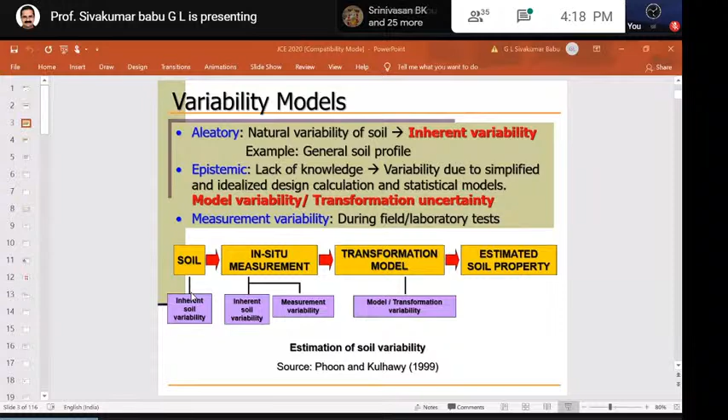Variability models. The heading is variability. Slide is visible, sir. Okay.

So the other important thing that we see in soils is what we call the scale of fluctuation. We know it's variable, and the moment you say it's variable, we call it a random variable. Random variables mean it has a mean value and a standard deviation. So if you know the mean value and standard deviation, then we have knowledge available from probability and statistics that we can use.

So for example, in an engineering sense, you have cohesion values and friction values, all of them variable. So for example, you have 10 cohesion values, 10 friction angle values, and you want to find out bearing capacity. Bearing capacity also will have 10 numbers, so it can be even 100 numbers - they're all variable, which is actually a fact.

But then the factor of safety itself is variable, and we want a factor of safety such that it is always more than 1. What is the probability that the factor of safety is more than 1? If it is 95% of the times - say for example, if you have 100 calculations and 95% of the time you get factor of safety more than 1, it only shows that the reliability is 90 or 95%. So that is one thing.

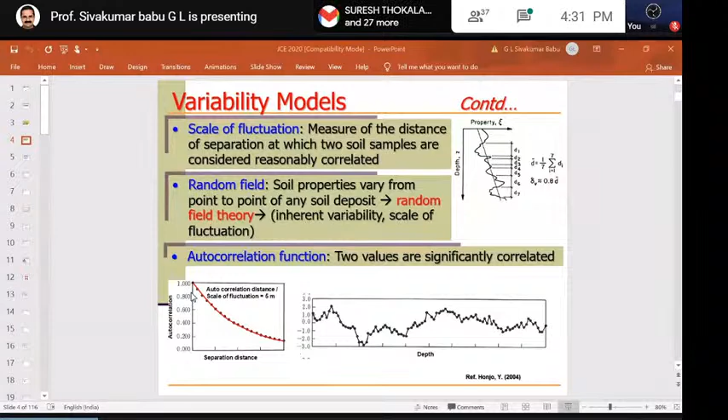Sorry for the interruption, sir—slides are not moving again. Which slide didn't move? Actually the slide is stuck at the 4th one. Only the 4th slide is visible, sir. Okay, are you able to listen? These are okay. Now you're able to see this number, this one you are able to see.

Thank you. These 3 slides are more about general things you must have heard already, so I can just quickly go through the third.

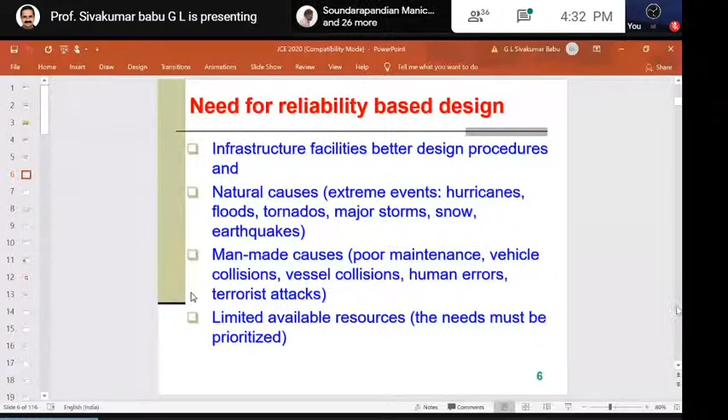The need for reliability-based design is very important because most loads and resistances are variable, so reliability analysis is important. The motivation is that variability exists in soils and concrete everywhere, so you can't just use an arbitrary factor of one or whatever you want. It is not correct—you have to arrive at it based on reliability analysis, particularly since the loads are highly variable.

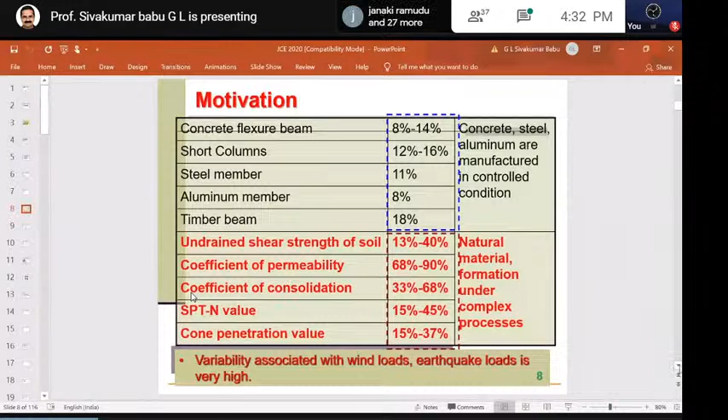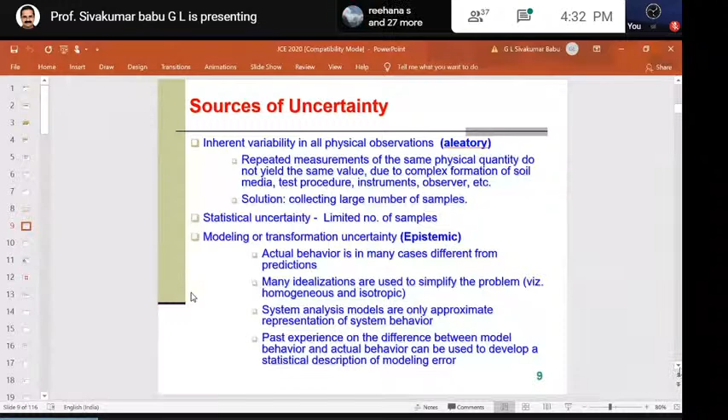Hello? Yes, sir. It is okay.

Visible, sir. So the thing is we want the capacity to be more than the demand, but how much more should it be, theoretically? We normally provide more than 1.5 to 2. The factor of safety is as high as 5 or 10 because we don't know about the design methods properly.

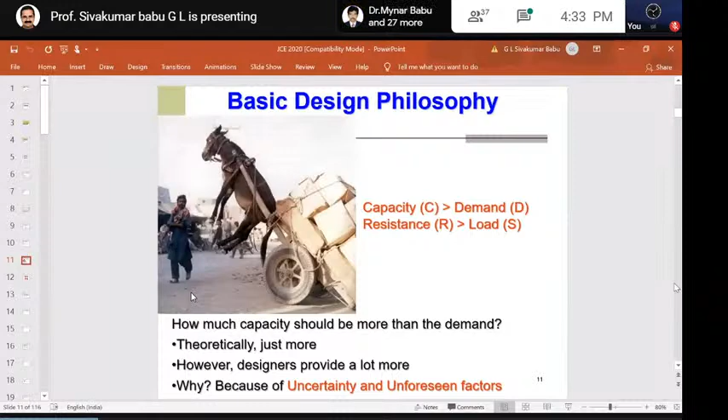I will show you that, and the other thing is, most of the time when you are trying to predict something, you should have a theoretical model and prediction, and it should be reasonably correct. So you use an equation for pile load capacity, or an equation for bearing capacity, and then you do a test, so it should be reasonably correct. There are some different conditions.

We call it unreliable and invalid, which we don't want. Unreliable but valid means there is a lot of error associated with that, like an SPT test. This is an example of an SPT test.

Reliable but not valid means there is always a bias. Say, for example, we know there is always a 20% extra - you use the equation, but it's always 20% extra. So we call it bias. It's reliable only, but you know what the bias is, so you correct for it. How do you correct for bias? We know it predicts at least 20% more all the time. So now you know that 20%, and you calculate the mean value and standard deviation of the bias. Once you know the standard deviation and mean value of bias, you can bring it down to the proper number. So both reliable and valid is something hitting the target.

Again, it should be reasonable, not too many errors - like more than 10% or 5% in other engineering fields, like mechanical and other things, would not be accepted. But unfortunately in soils, everything is naturally variable. In civil engineering, we accept this because the variability is high.

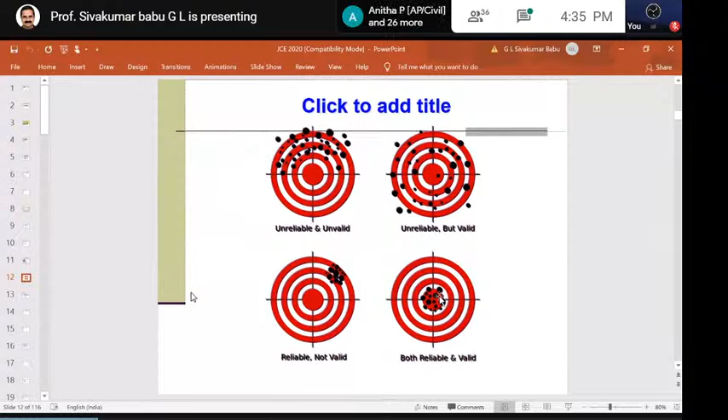Because one important thing is there is always a probability of failure, and probability of failure can never be zero. But in manufacturing, like mechanical and electronics, they try to reduce the probability to very low levels - they use what's called 6 sigma and so on.

So the 3 sigma rule we know, based on normal distribution. And the rule is that design codes must always have a rational factor of safety - it should not be too expensive, and it should not result in too many failures. So we need to do a reliability analysis.

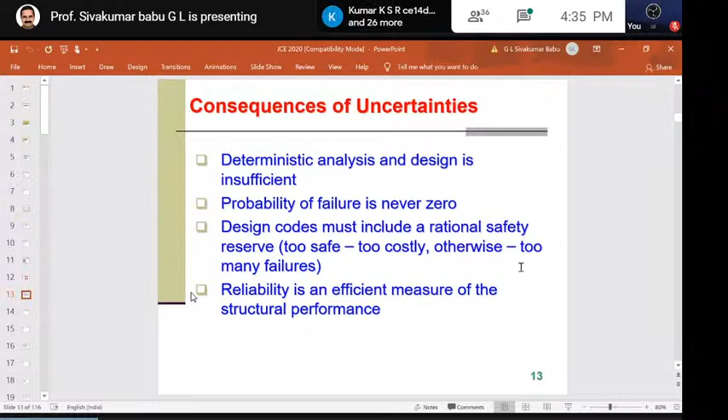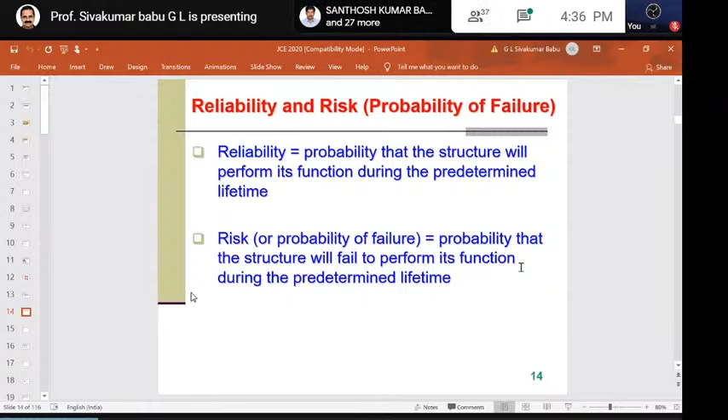That's what we'll do. Reliability analysis is the probability that the structure will perform its function during the predetermined lifetime, whereas risk is opposite - risk is also in terms of failure consequences. Like, for example, sea erosion, and what the impacts are. You need to look at how many people are affected, particularly in environmental engineering and other fields.

Another problem is that the risk approach is not rational - what is risk to you is not risk to somebody else. Because of that, risk perception is different. Like earthquakes - you give a lot of weightage to earthquake failures and flood failures, but poor maintenance, we don't care, at least in the Indian context. So risk perception needs to be rational and uniform.

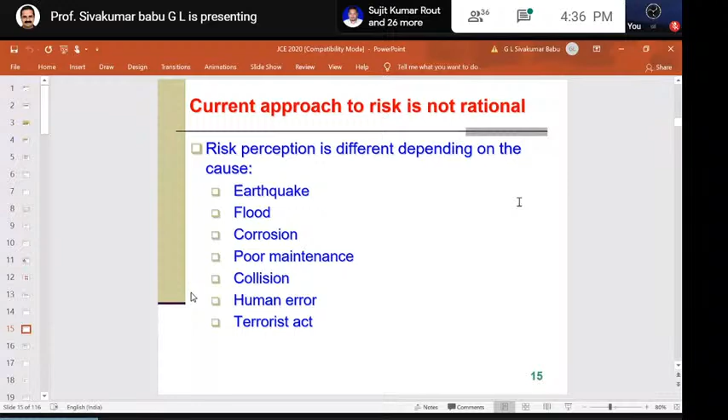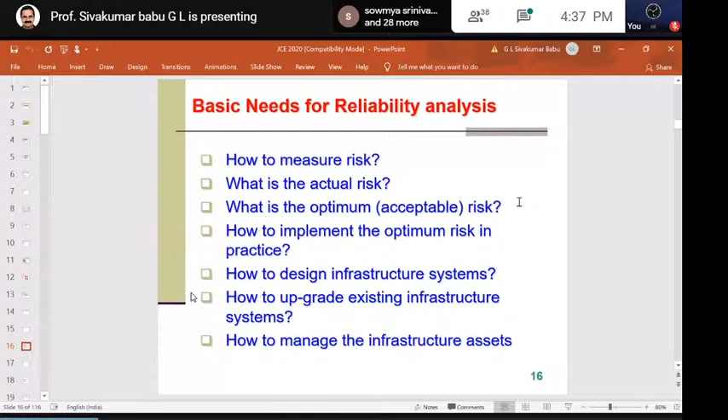So we'll discuss how to measure risk or reliability, how to incorporate risk or reliability in practice, and how to design infrastructure systems for risk, whether it's a road or a pile foundation - the philosophy is the same. And how to upgrade existing infrastructure to have a certain reliability, because if you go to the World Bank or ADB, Asian Development Bank rules, they say you have to meet certain standards, otherwise your project won't be approved. So that's what we'll see.

As I said, in loads and resistances - load has certain parameters. For example, wind load or wave loads - what is the speed, what is the load, it has some equation, right? And earthquake also has earthquake loads - it has a maximum credible level, all the parameters of the earthquake that we should have.

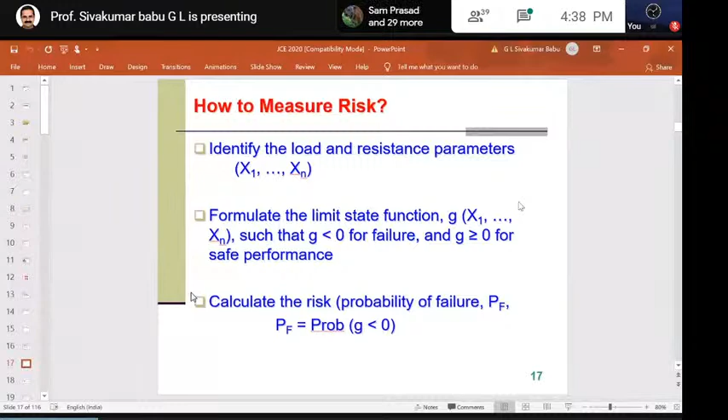Resistance parameters - what resistance parameters do you need to have? C, phi, gamma, modulus - all of that are resistance parameters, right? So we try to formulate a limit state function. Actually, factor of safety is a limit state function, because factor of safety equal to 1 is called limit state - that is called the state of failure. We don't want factor of safety less than 1, that is for failure, and more than 1 is reliable. So you can say R minus S, resistance minus load. Resistance should be more than the load S, or capacity should be C minus D, like that. So we can always say that. So this is what I would like to illustrate, that the resistances...

Are you able to see this diagram? Figure slide 18. Hello. Yes, sir. Hello. Yeah.

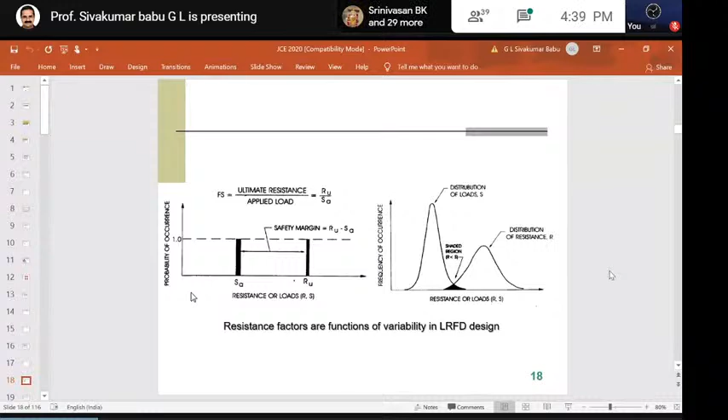So the resistances should always be more than the loads, and they're all distributions. So as I just mentioned, the factor of safety approach is always tricky, but our interest is to say to what extent is the factor of safety value evaluation is correct - you can say, because it can have a bias. And what's the probability that the factor of safety is more than 1? If I say that it is 95%, then it's good. That's what it is. And the advantage is that it can take care of the construction costs - there are some methods how it can be done.

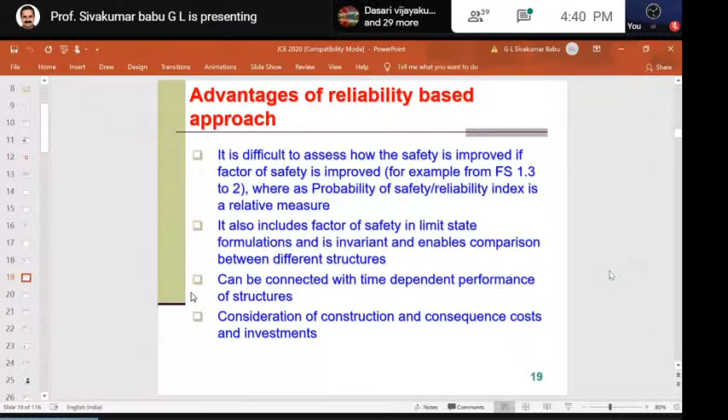Say, for example, the probability of failure or safety in a mine - nobody is there, so the consequences are minimum. But in a centrally located place in Vizag, the consequences could be very high. So you may intuitively go for higher factors of safety, but it may not be necessary. You can exactly calculate if you know the consequences. Say, for example, there will be blocks, there will be project delays - there are so many consequence costs. If you're able to have an idea of the consequence costs, you can come out with a proper safety factor. What is the required safety required?

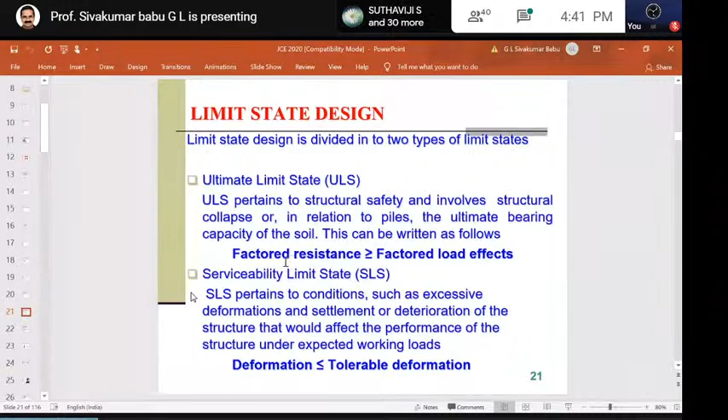So we do working stress method of design, which we don't want. This is what I was telling, that we'll have factored resistance - the resistance should be always more than the loads. So we use some factors, we always reduce the resistance, because how do you calculate that resistance? It's based on the statistics. It could be 0.5, 0.8, depends on the probability distribution, and even factored loads depend on the loads. So for example, you're designing it for 10-year loads, or you're designing for 50-year loads, so the factored loads will be different, like 1.2, or it could be 1.8. Even creep factors, anything - if you have data, you can always do that. These factored values are important.

And so the advantage of this is that it will lead to efficient design - that's what people have seen, because I will show one or two examples on cost savings as well. And it gives more perception of the uncertain factors, rigorous treatment, whether it is for superstructures and substructures, and the codes can be relooked at properly. If our quality of control is not good in India, your factors can be put in there. You measure what is the quality - you may have poor equipment in India, whereas they have automatic equipment in some other project. So they can really show that by taking some samples, or they need to have experience to say no, I don't go for the same factor of safety because I have better equipment, my uncertainty is quite less compared to the SPT test that some other company is doing. So you can come out with this sort of numbers, and that is there in certain projects also abroad.

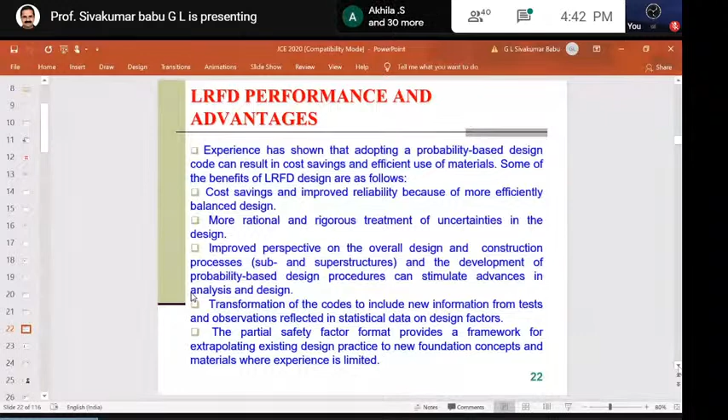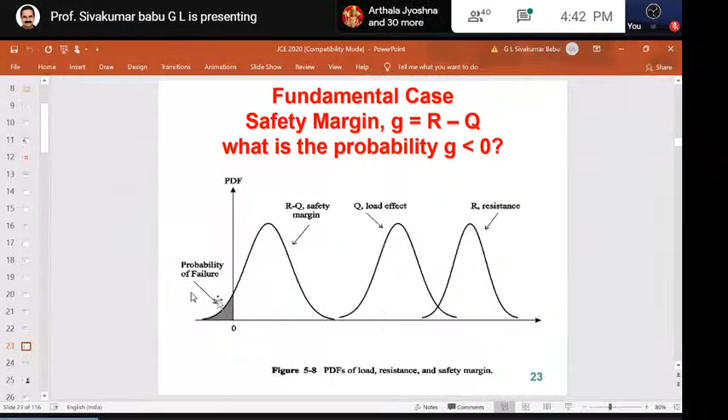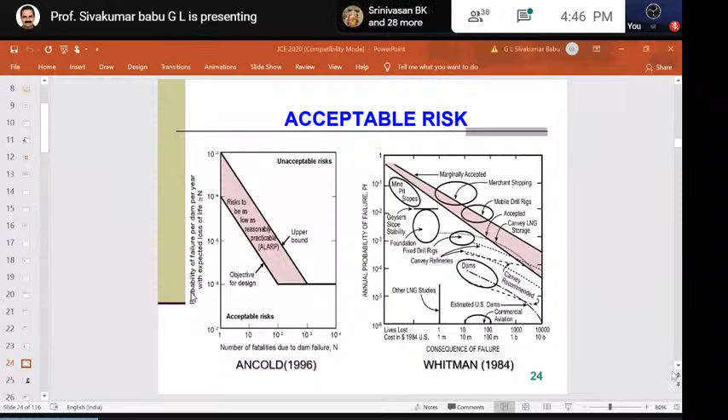So how do you calculate this probability of failure? I told you about the mean value of loads - they'll have a normal distribution, a bell-shaped curve. If you know the mean value of resistance and the mean value of loads, you find out the mean values and standard deviations, and you'll get beta. It should always be 2 or 3 or something, or the probability of failure has to be quite low.

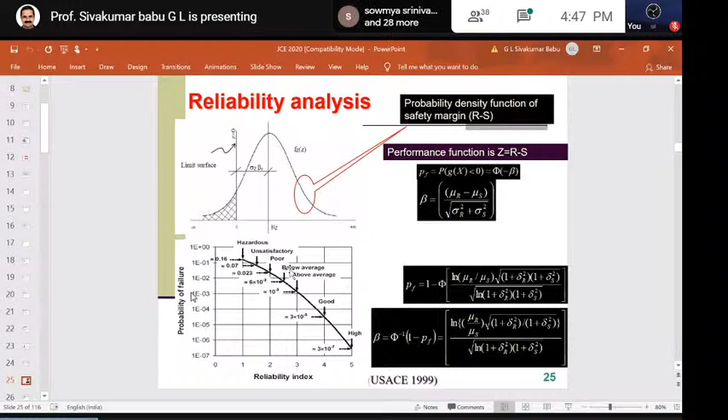This is actually given by the US Corps of Engineers - people working on dams follow it, or even in regular codes they follow it. So beta is in terms of 2 or 3, as I gave in a table here. If the probability of failure is 0.1, beta is 1.28, but if it's 1 in 100, it's 2.33, and 1 in 1000, it's 3.09. So for shallow foundations and deep foundations, you try to use this.

The important thing to realize is that this is a notional probability - it's just to improve our understanding of the behavior of structures and safety. It's not that if we have 10 structures, exactly one should fail. It is a relative measure of safety. I cannot say if one factor of safety is 2 and another is 1.6, which one is safe - somebody may say 2 is more, but I'll give an example in a few minutes showing that idea is totally wrong.

So we'll discuss how to measure risk, and there are calculation methods - first order reliability methods, Monte Carlo simulations, and many other things. And what is acceptable risk or reliability? Codes are available, like US Corps of Engineers, Joint Committee on Structural Safety - they're all there.

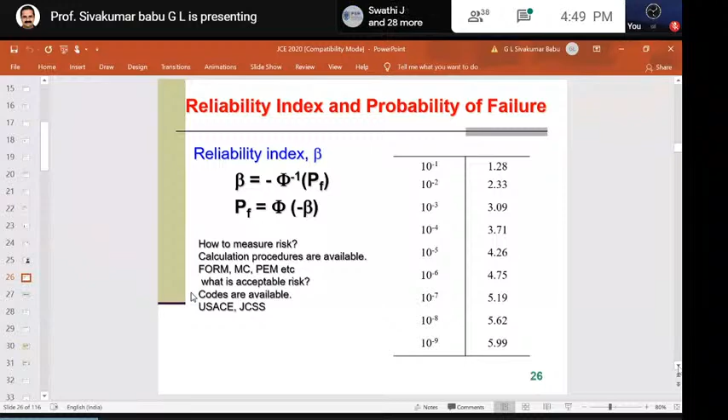Whatever people do in designs, it's already inherently built in. Sometimes in some countries, if you directly tell them about reliability, they may run away - there's a possibility, they say 'I don't want to understand this probability distribution and calculation, tell me in a simple way.' So people have already built these in; they may not know the details, but the people who make the codes know what numbers people should use in these conditions.

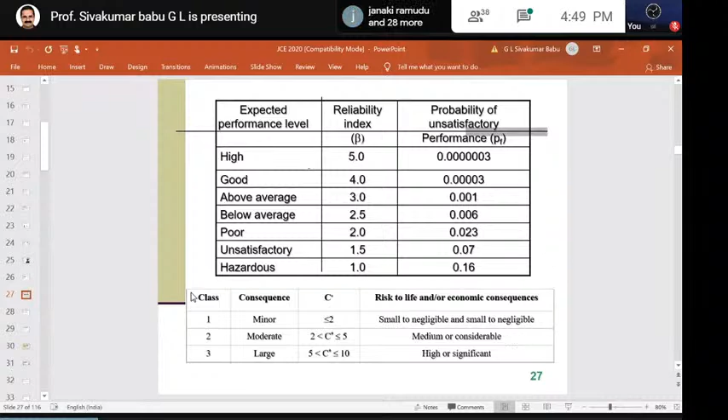So this is given by the US Army Corps of Engineers, and this is given by the Joint Committee on Structural Safety. I wanted to give an example of a foundation design in a marine environment.

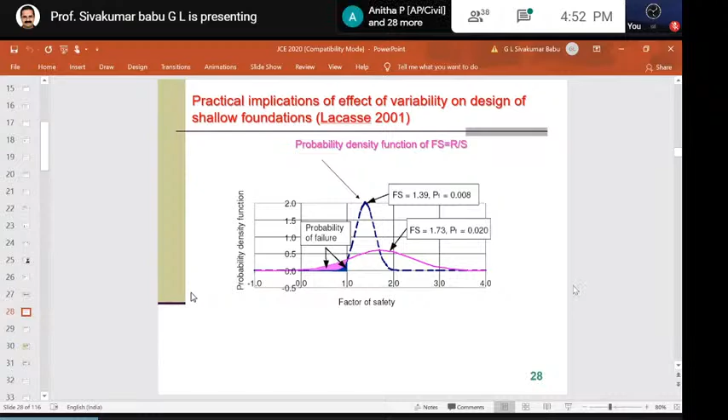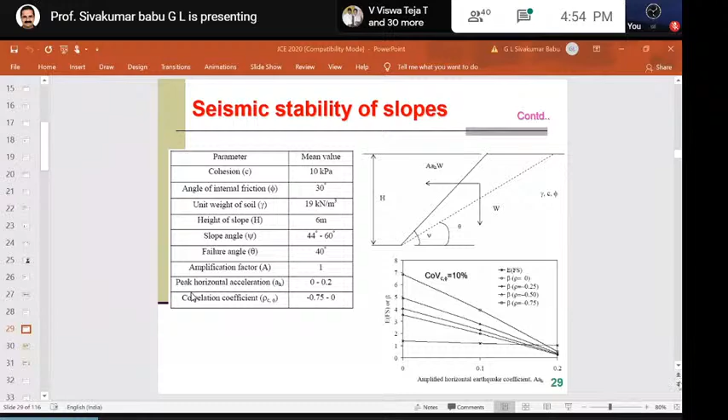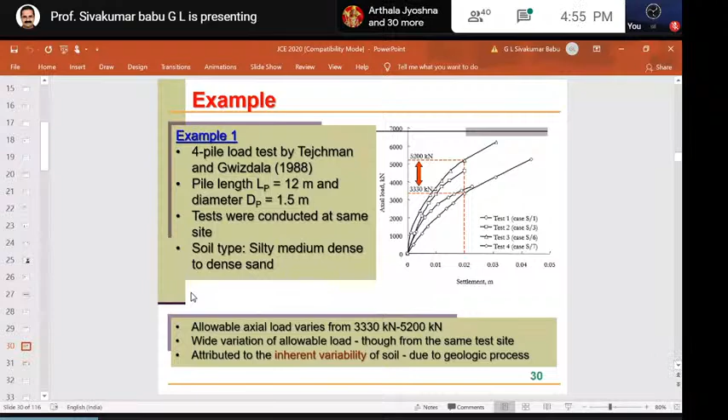This is about pile load tests. In literature, you have many examples that say, for example, if you're looking at an allowable settlement of 0.02, you will get varieties of loads. Like, on the same type of soil, you have 4 tests done, and the load varies from 3330 to 5200 kilonewtons. So which one should I take? This is actually available in literature, in denser sand. Why is that? There's nothing wrong in the testing, but it's inherently variable due to geological processes. You have to consider this. How do you do this is a question we'll see.

This reliability analysis we already discussed. We have a lot of methods to do that. One simple way is that you know the capacity, how to calculate factor of safety. So if you have say 100 C values and 100 friction angle values, you can calculate 100 factors of safety. Then you tabulate them and find out what is the probability of safety being more than 95%. You take it, and corresponding to that you calculate the factor of safety, because all the factors of safety will have a distribution, like I showed you in the previous example. So corresponding to 95% you get, whether it is 1.2, 1.5, 2, or 3, don't bother, because that gives you the probability that it's 95% satisfactory. So that's the way. That is called Monte Carlo simulation.

Actually, now you can do it in 5 minutes. You don't need to work too much. You have Excel or MATLAB or something, you can even generate it. I will show you it can be done in a simple way. There are so many ways of doing it.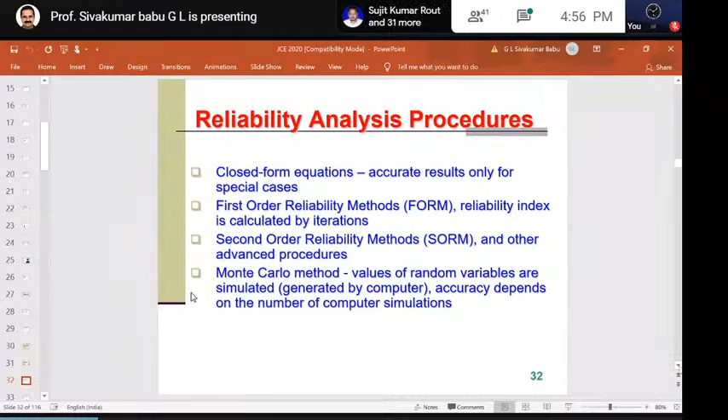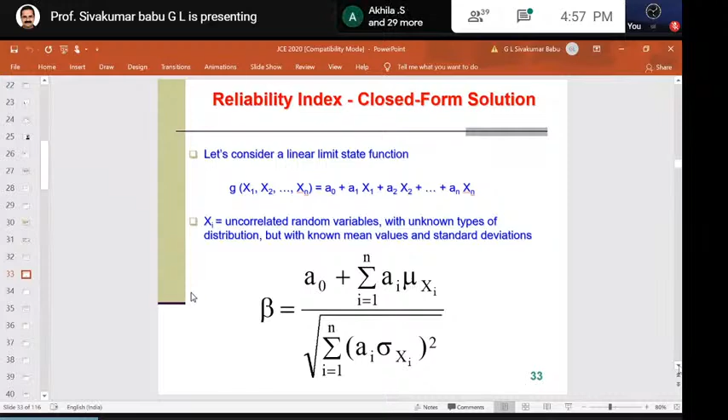Normally I told you that the limit state function is called the factor of safety equation, so then we are trying to calculate the reliability index. This is a simple thing one can calculate, either by different methods. For example, if the cohesion of the soil is 10% variable and friction angle is 20% variable, what is the variation in factor of safety? You also have simple methods of calculation, like using the Taylor series method, similar to what we studied in engineering, like if I make a 10% error in chain measurement, what is the error in total measurement? These are the same type of error methods. Our objective is to reduce errors, right? So we have methods to calculate the reliability index, which tells you how far away you are from what is called the failure or the limit state.

We also have a term called sensitivity analysis, which looks at the factors to which this factor of safety is sensitive. Sometimes there will be 5 to 10 parameters and you don't know what to do. You calculate everything, but with 10 parameters you can't always do that. For example, in a building, the deflection at a point could be due to many other loads, combinations, moments, and all of that. You're trying to calculate, because you can't do the same calculations every time. It becomes cumbersome, even in finite element analysis. So you have to find out which are the critical parameters to consider, maybe 4, 5, or 6. For example, there's a bending moment or shear force critical at a particular point, and you need to know which factors affect that. Maybe there are 100 factors, but I don't need all 100, only 4, 5, or 6, because that is called sensitivity analysis. Their contribution is large somewhere, but loading on the top floor may have not even a 1% effect on this point. So that's fine.

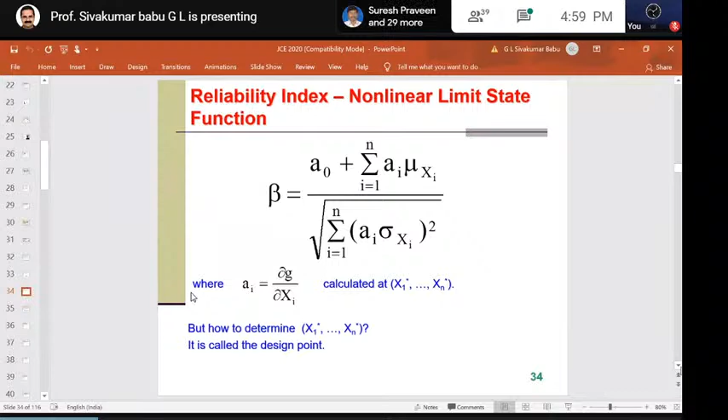So we do that, as I just mentioned, about Monte Carlo simulations, and that's a very useful technique. I just mentioned about target reliability index or probability of failure, as I just discussed.

Essentially, it can be based on the codes that we already have. But if you're working on a new project, say for example, trying to build a structure in a coastal area, or dealing with a sea erosion problem, or anything like that, how do you do this?

You have to understand the consequence of failure. Sometimes the problem with codes is that they're all general, and if you follow codes blindly and your structure fails, then it's a shame. So we want the consequence of failure to be minimum. We have to understand the consequence of failure, and if you do a little improvement, what is the change in reliability? We also have to find that out, because we've seen in many rehabilitation projects that you may want to do a lot of rehabilitation, and it needs so much, but there could be some things that, if you repair, may contribute to 90% improvement, while others contribute only 5%. So you ignore that.

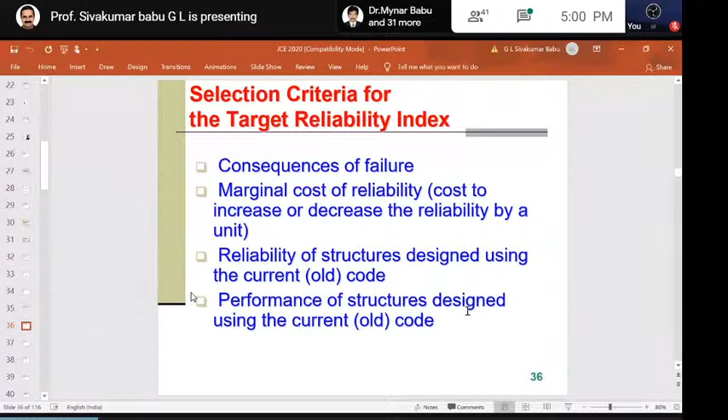So you can always do that, and it helps in code making because it's very important. There are different limit states, like the strength limit state, serviceability limit state, fatigue and fracture limit state, and extreme event limit states.

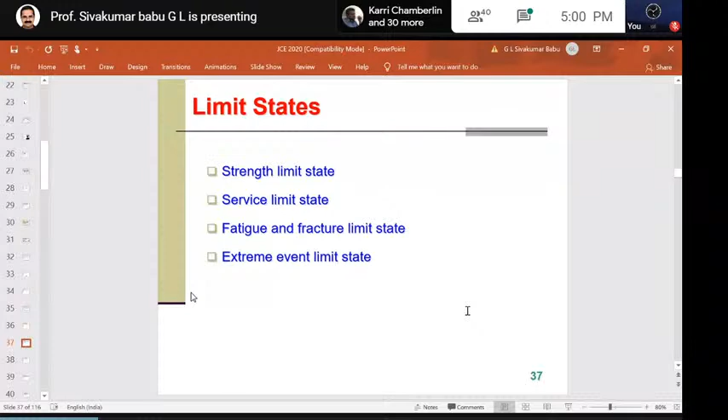So, for example, under certain conditions they should not fail, right? There are many other things like primary components and secondary components in a system, or in any engineering system we have, which are the primary inputs and the secondary inputs, and that can be worked out.

And there will be load paths, single load paths, multiple load paths, loads coming from different sources. Loads can be so much, right? Like live load, wind load, and all those combinations. How do you do that?

Then there's redundancy. This is important because you should understand how loads act on the systems, and we also have to have the necessary redundancy. This is very, very important. Redundancy should be there, extra capacity, but how much extra? If you just don't know, then our designs are meaningless.

So, for example, in a pile foundation design, you have to calculate how many extra piles are required to achieve the same level of reliability. It's not that factor of safety alone will help you here. Actually, it is ridiculous, and I don't mind saying that. You need an extra number of piles that will give you that reliability, say 0.99 or whatever. You have to account for the load, and how much.

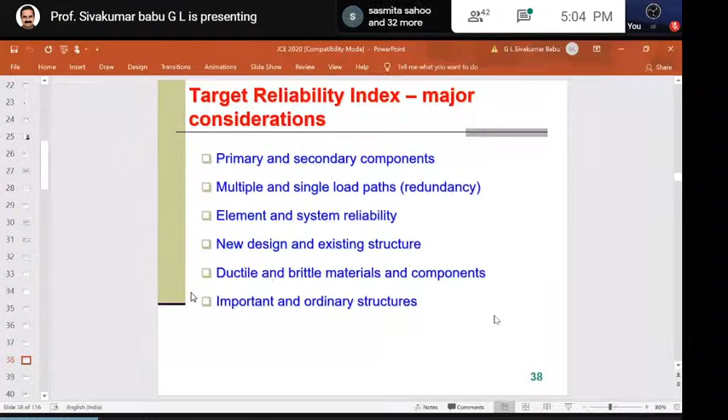So there's primary component, secondary component, new design. I already discussed this. I'll give some examples of what I've been working on. There are so many, at least all my PhDs are on this, because I find it very interesting and nobody is really concentrating on this, and it's quite interesting.

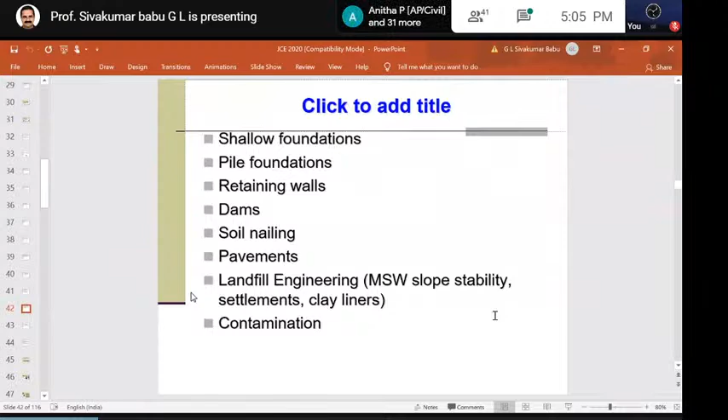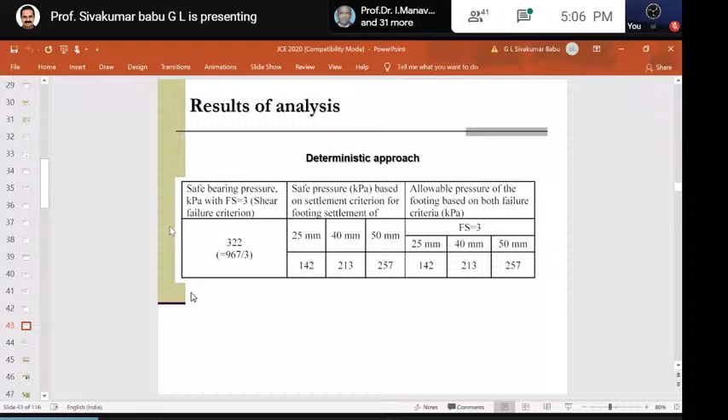Then you also use a settlement criteria, so for 25 mm or 40 mm or 50 mm, what is the allowable safe pressure? It could be, we know that as settlement increases, bearing pressure increases, it could be 257. So whichever is least, we take that, and depending on what settlement you want, it can vary from 140 to 257, because 322 here is higher.

So the reliability index you can always calculate, like I mentioned, C and phi values are all variable, right? So you can always calculate reliability index. I told you reliability index can vary from 2 to 3.

So for a number of 3, there are two things here: the soil is spatially variable, or without variability, meaning there's an autocorrelation distance and all of that. Without spatial variability, it is a little lower, 270. But with spatial variability it is better. Always the thing is that if you consider spatial variability, it is always higher.

And here also you get settlement criteria. So what it shows is that you get 226 for 50 mm could be the allowable pressure. One important thing is that this basis of 25, 40, 50 mm, you should really come out with proper numbers. You can see they're considerably different, like 25 to 50 mm gives 124 to 226. Even in the previous case also they're different, like we said 257 here but 226 here, so the allowable pressure is a little less.

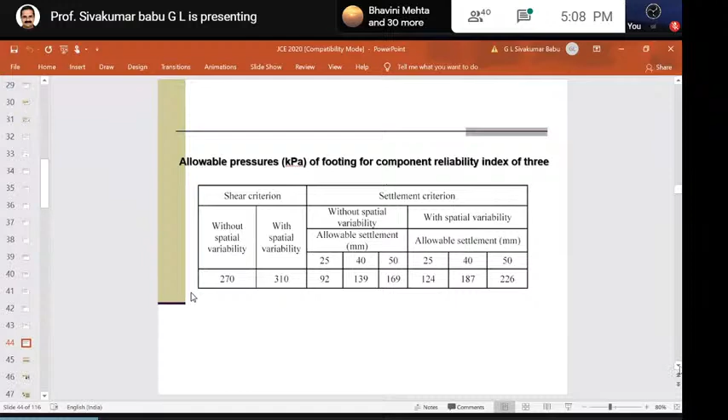Okay, yes, thank you. So this sort of thing one can calculate. So I will give some examples of piles.

You have a lot of design methods, and one can also use numerical analysis. This is an example of numerical analysis which we did. One of my students, Mr. Sumanta Haldar, now at IIT Bhubaneswar, did all of this work. The way numerical analysis uses what is called FLAC or finite element is much better than conventional methods, because conventional design methods have assumptions and all of that, whereas in numerical analysis you don't have so many issues.

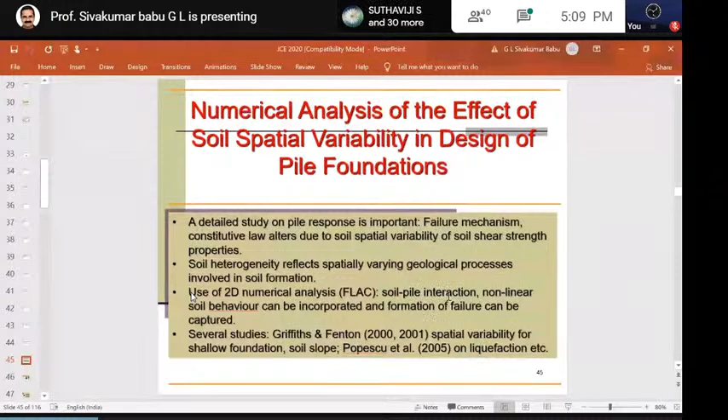You simply load the system and use appropriate properties, or even introduce variability. We did that type of analysis, like for a pile, and we were able to do this. In fact, I was mentioning about random field.

What it means is that if point-to-point variations are too much, it is highly erratic, so you'll have more weak zones. But if the soil is uniform, the weak zones are less. If the standard deviation or coefficient of variation is high, it is more weak, so the planes of weakness can really be identified. We were able to do that in certain problems, which will give you an idea.

For example, increase in coefficient of variation for undrained shear strength of soils shows erratic nature of soil, more weak zones, at low values of correlation distance, meaning point to point they're very nearby, so the soil is erratic. But if we increase the distance and get the numerical results, you get a better result.

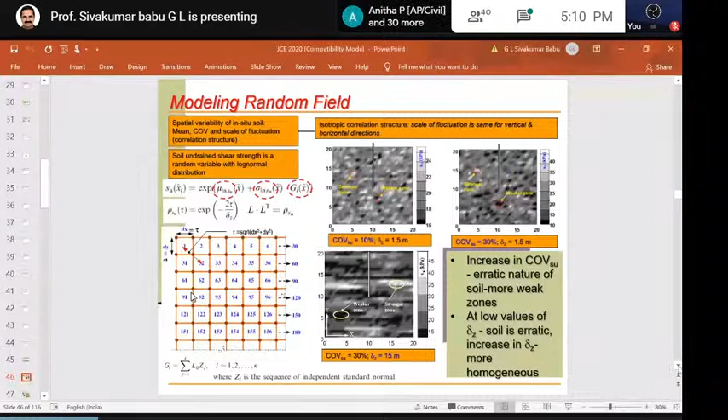Then what we do, I will just show. We did this for a vertically loaded pile and all of that, some numerical analysis. This is the interesting thing: depending on the numerical simulation runs, I told you earlier that in the field you are doing only 4 or 5 tests.

Okay, for a few, 5 or 6 tests are okay, that's fine, and that can be used as a basis. Ideally, to satisfy a normal distribution, we should have about 30 tests.

To make it reasonable, you can construct upper bounds and lower bounds and do Monte Carlo simulations, like here. You can even do that in numerical analysis and get results without even doing testing, for 100 or 1000 samples. It can be many. Let me show you a previous result where sample size was 200.

200 samples. If you take low samples, what happens? The standard deviation will be low. It's like if I have 5 samples, 1,2,3,4,5 - the average of 1,2,3,4,5 is different from 1,2,3 or 3,4,5, right? We know average and standard deviation are different. So I cannot say anything from few samples. But as the sample size increases and becomes constant, it becomes very clear that the standard deviation is the same for measured loads, though you still get some error.

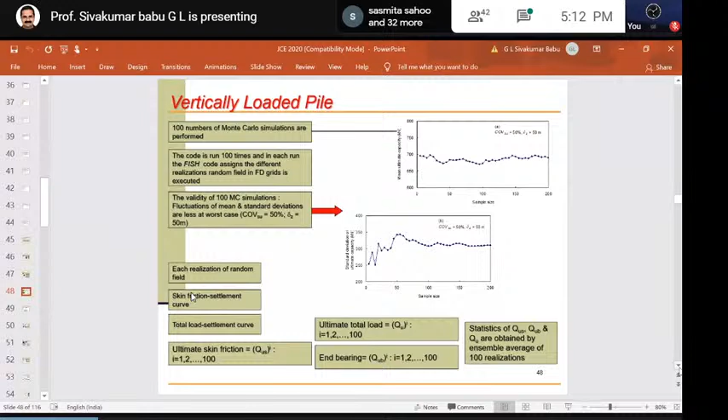I can do only maybe 10 or whatever number. Try to understand it and see how they fit into these numbers, and the others you can numerically generate, and get the overall response, because we assume that the numerical pile test results give the actual picture, since you've already validated it with the field result.

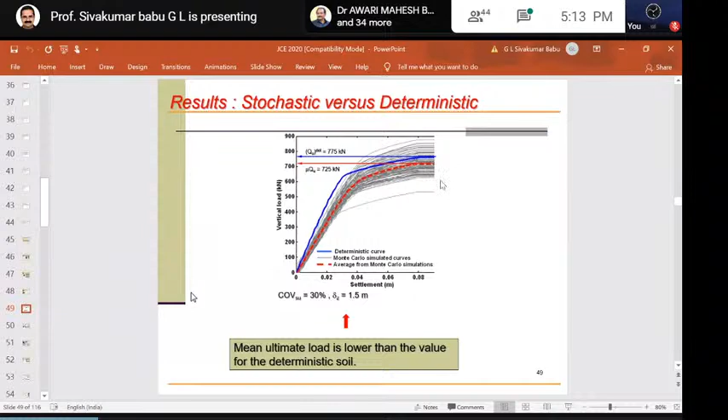You get this, and you don't worry about applying factors of safety blindly. Look at these trends, then calculate the allowable loads. You get a deterministic curve, and you get a Monte Carlo simulation where you find the average. That may be better than just having a deterministic curve, because the averaged curve from Monte Carlo simulations gives a correct picture, being an average, whereas a deterministic test is just 1 or 2 tests. The Monte Carlo simulations give a wide range, and being an average, it will give a correct picture.

So that will tell you how much correction you have to apply for a particular number. One can do a lot of studies on this. Normally, for example, ultimate bearing capacity - we have a deterministic number. Then how much should it be reduced? Should I have a factor of safety of 3 or 2.5 or whatever? How do you get it? I cannot say arbitrarily.

So that's what we do, right? Ultimate bearing capacity, for example, shallow foundation uses 5.14 cu for a footing resting on soft soil, or if you take it deeper it's different, or if you have a pile it's 9 cu. All of this one can calculate, so the deterministic value is known, but how much the factor of safety should be reduced cannot be arbitrary. I cannot just use a factor of 3 or 2 or something - it can be done as per codes.

You can say it's per codes, but if you do a reliability analysis and show that, suppose the soil is fairly uniform and using a factor of safety of 3 gives you less load, then it's not correct. If you're able to prove through proper testing and analysis that the factor of safety can be reduced to 1.5, you will be benefited. The pile diameters will change a lot, and the cost of the project itself is completely impacted. Do you get this point?

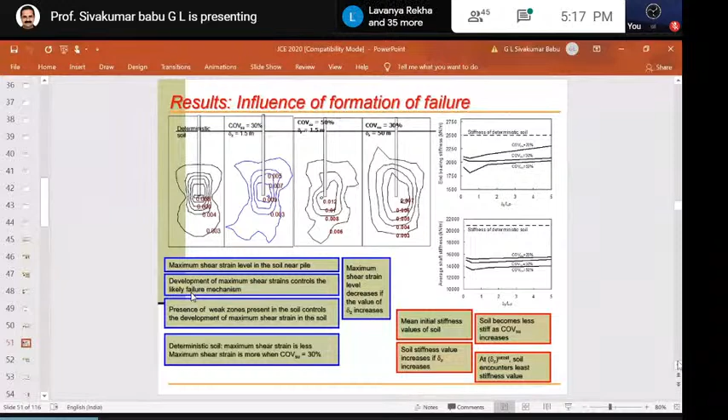Then what happens there? The strains are higher, strains will be more there. So strain accumulation happens, and finally it fails on that side. Why failures? Like you could have seen that failures only happen at some places, not all places. Like infection happens only in some places. It's like that, so unless things are weak zones.

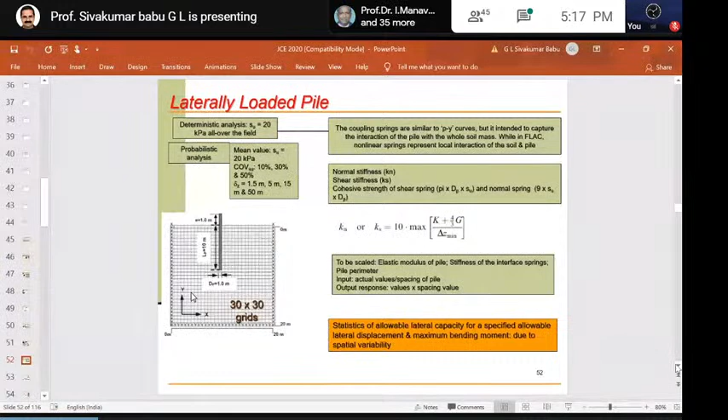The same logic we did for laterally loaded piles, okay? And this is all published in ASCE, Geotechnique, and so many journal papers. The same thing, like average - you try to calculate using simulations or some calculations and try to find out the mean value and standard deviation.

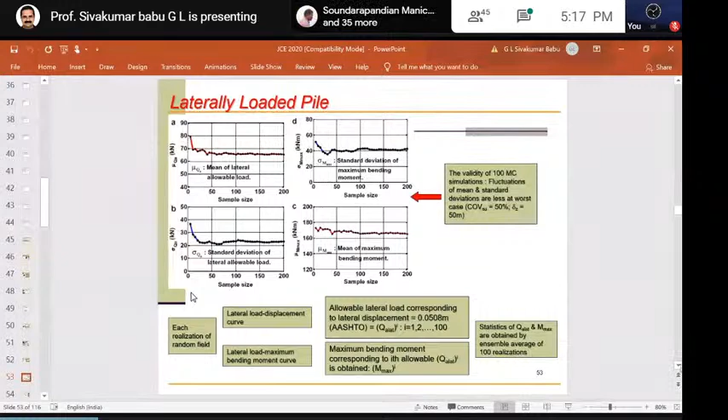You're not confident in the first 3 or 4 trials, but you understand the behavior completely and try to find out the extent at which they can become constant, and then find their mean value and standard deviation. That's what it means. Then you are very confident of your design.

Same thing for laterally loaded piles - we did stochastic, meaning variable analysis, and deterministic. What is the difference? Depending on the length, the deflection limits and all of that, you can always talk about allowable deflections, what you get, and what partial factor you have to use. You can get it, because pile foundations are so expensive.

In fact, I know many cases where piling contractors are very happy, but owners are not happy, designers are not happy. Why should I have this situation? I myself had to struggle in a couple of cases, because the pile contractors insist, they make a lot of money. So they don't want to improve quality of testing, because improved testing leads to more economic design, which means the number of piles are reduced - whether it is Vizag, Kochi, or Mumbai, I'm seeing the same trend.

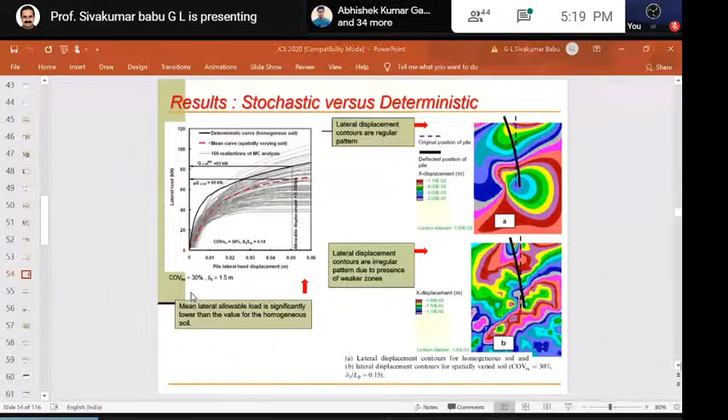So this is a pity that we have. We need to understand that the value of information that goes into this is very, very important. Yeah, so the same thing - how this information can be used in design.

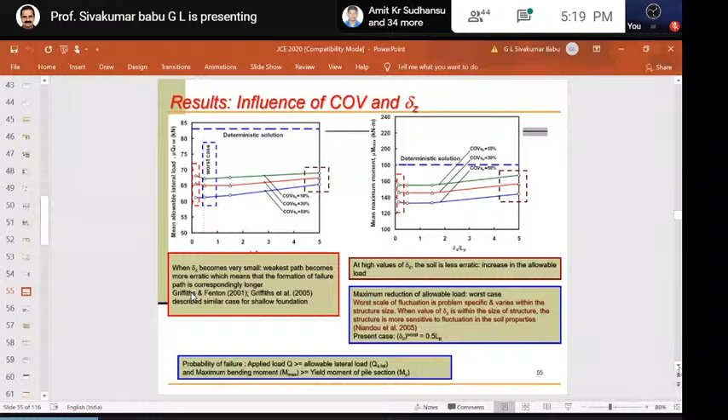These are some results I just wanted to share, how the failure happens and its influence on the formation of failure. Because as I said, you apply load, but wherever there's a weak zone or weak strata, the failure starts from there. Then you keep applying load, it develops, and then it envelops. If the conditions are more conducive to failure, things happen.

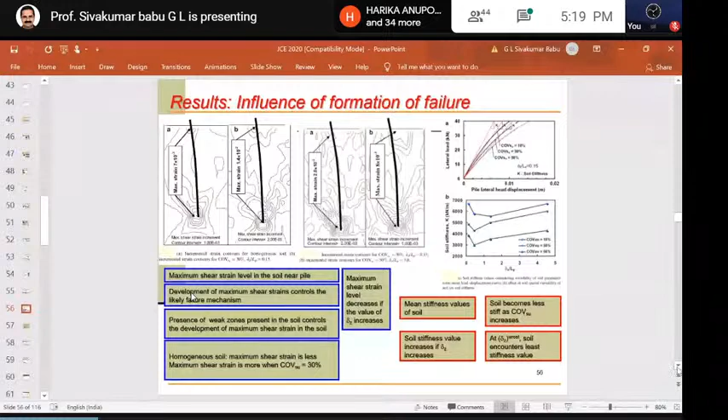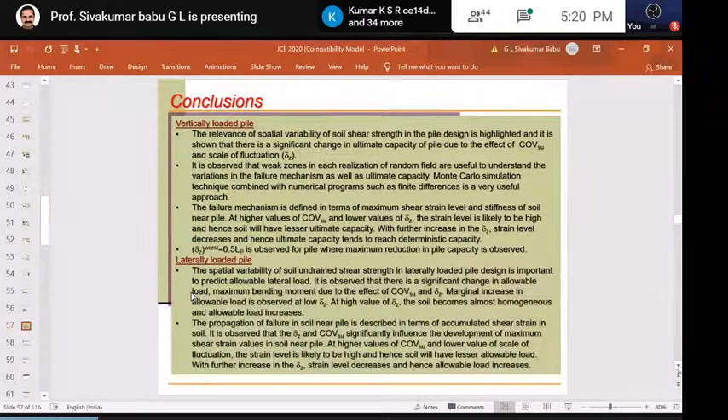So that way, you can capture this in numerical analysis and even probabilistic analysis properly and take precautions. For example, you do grouting or whatever you want to do, and you can simulate that process also. So I just want to tell you that the spatial variability of soils can be considered based on proper reliability analysis, whether it's vertically loaded or laterally loaded.

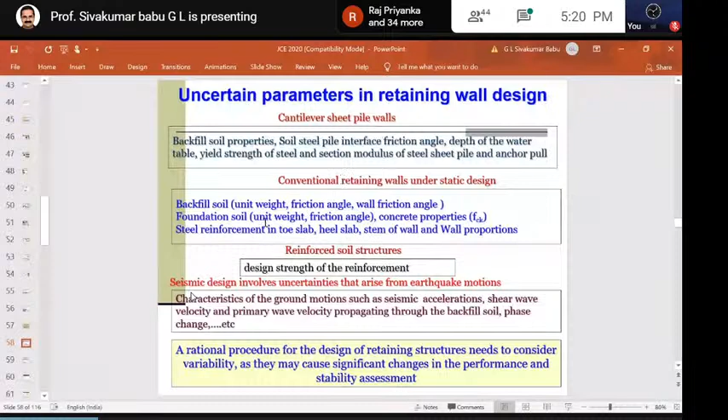I'll take maybe another 5 minutes, because I thought I'll leave it for questions, otherwise I have a lot of information. Even retaining wall design - we have different types of retaining walls: cantilever, reinforced soil structures, and all of that, static and dynamic conditions.

In the reliability calculations, there are different levels of design. One is called, as I said, LRFD. That is followed in the US, or actually they call it partial factors code. Even in Federal Highway, they use this. That is level 1. Factor of safety is level 0.

I want to make the statement that factor of safety, it is actually because you're not considering uncertainties, and it is okay - maybe we have been doing it, but when you have so much data, so much quality control required, methods are different. Then you have to use better methods. So we use level 1, called semi-probabilistic methods, for simple calculations.

Approximate probabilistic methods, I just showed, like simulations and all of that. Then even fully probabilistic methods mean that in optimization, costs and all that, you will get a very good benefit—at least you're sure what exactly you're doing. That's why, when there is so much data analysis, cost and sustainability analysis, if you do that, you'll get a very good picture of the whole design.

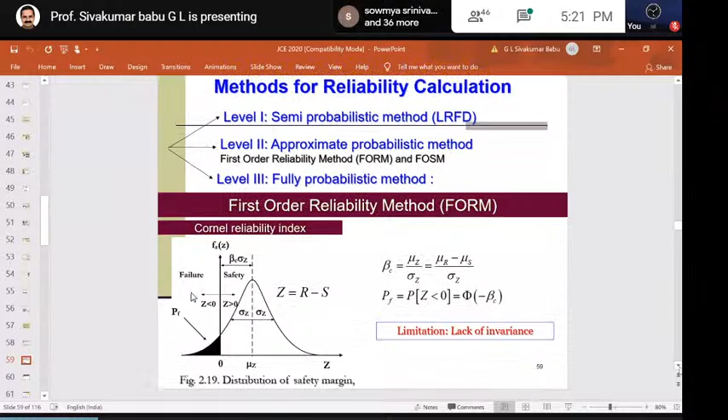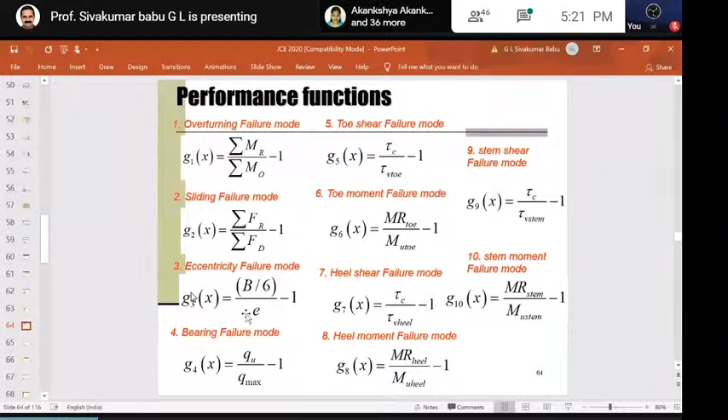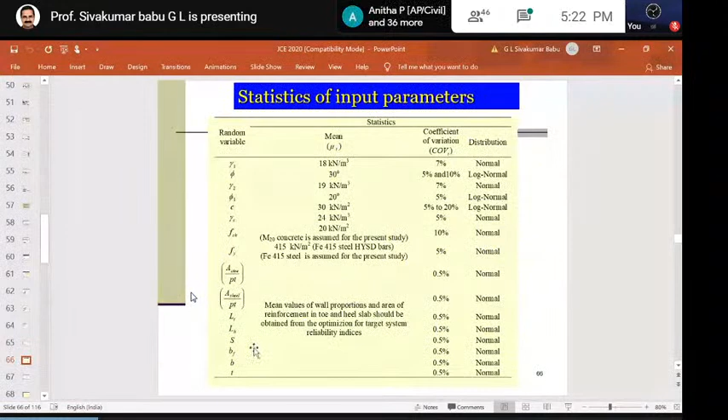Now I want to discuss retaining wall failure. You have so many limit states in retaining walls: overturning failure, shear failure, eccentricity, bearing capacity failure, and so on. There are so many parameters also, and all of them are variable.

I want to show you the target reliability index—if you change different parameters, since there are so many failure modes, you'll get different reliability indices. How do they change as a function of the dimensions of the retaining wall, like the length of the heel divided by the height of the retaining wall?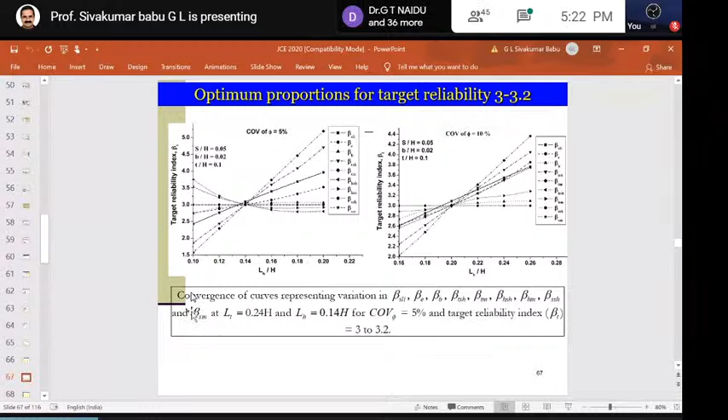Based on that, we're able to get optimum dimensions for retaining walls. It's a very interesting case—if you open any book like Bowles' or similar, they'll give you some standard dimensions: take 0.3h, 0.4h for heel length, something like that.

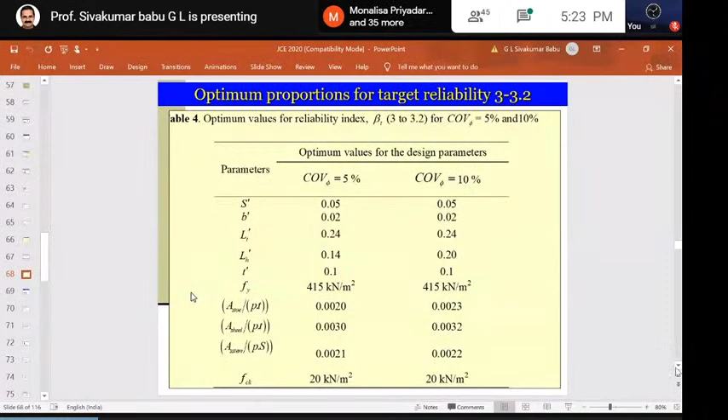But we are looking at, based on our analysis, the length of the toe and heel, like 0.24h, and so on—we're able to derive that. What we found was that if you use this design... in fact I've cited Bowles' book, Das's book, and there are many papers on this.

If you do a reliability analysis, you get a 30-35% reduction in the area of concrete—percentage savings in the area of the retaining wall for different heights. The reductions in cross-section compared to conventional design specifications are 7 to 27%, which is good, right?

So what I want to say is that we have to understand—why should we blindly follow specifications? I've seen cases where they followed the specifications, but the failure still happened. So following specifications doesn't guarantee anything; the design has to be correct.

Maybe I'll stop at this stage—it's 5:24, and I'll open it for questions. I have a lot of information, but I think I could cover some shallow foundations, pile foundations, and give an idea of retaining walls. So I'll open it for questions at this stage.

Tell me, sir. Yes. This is Krishnamraju, sir. Yes, sir.

Tell me, sir. I am fortunate that I attended Dayaratnam Garu's lecture on this. Oh, great, very nice. That was 25 years back when I was studying M.Tech in Andhra University.

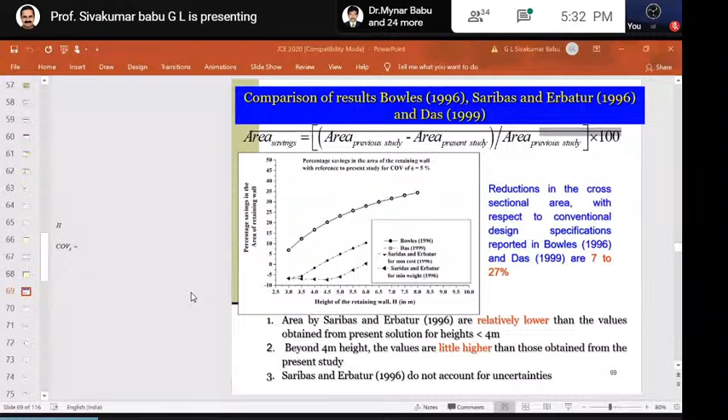The very reason for not seeing many failures in Visakhapatnam during Hudhud is just because of high factors of safety used, not only in material strength but also in evaluation of bearing capacity of soils. The probability of failure will change if the loading condition varies significantly from what is adopted for design, so factors of safety are protecting. Instead, in large projects, it's always advisable to go for more detailed investigations and adopt reliability based design, considering all uncertainties into account.

So I have posted the book, Structural Reliability Analysis and Design by Ranganathan. It's a very good book, covered with a number of illustrations. Those who are interested can have a copy of it and go through it.

Actually, he's a student of Professor Dayaratnam. He's very good, a good book for Indian conditions. He takes a lot of data on wind loads, live loads, and all of that. It's a nice book, but you can apply it to any area.